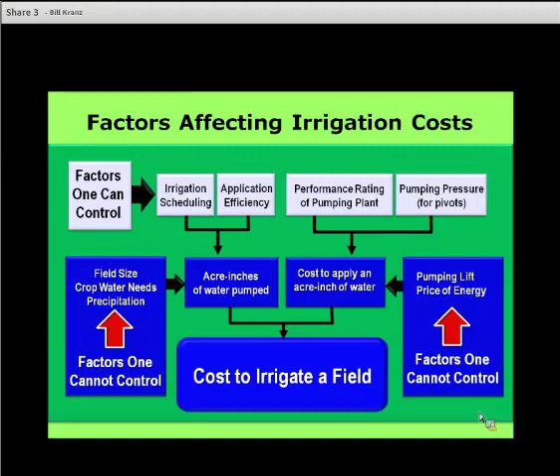and then water application efficiency is going to be just a small part of it. The idea is we're going to reduce the number of acre inches of water pumped by doing a better job of matching up with crop water needs and utilizing precipitation to the greatest extent possible. And again, we end up by summing those up to how much it costs to irrigate a field.

The management tools that we're going to talk about basically allow us to answer these four questions: when I should start irrigating, when I can stop, how much water does the crop require at different points of the growing season, or how much is it using out of the soil profile, and then have an idea of how much we're actually putting on.

One of the more traditional ways of looking at soil water monitoring and irrigation scheduling involves using the hand feel method, where basically we just take a hand coring device and collect a sample from different depths in the soil profile. This is the widest used method even in Nebraska today because that's what crop consultants typically will do. It's very practical. You don't need a lot of equipment.

The one thing about it is how accurate can you get, and you really need to be well trained and calibrated with your hand and have a lot of experience with different soil textures in order to do a reasonable job with this arrangement. But you have the answer right there on site. You don't need to necessarily consult a table of values for what the current soil water content is. You know it right when you're doing it.

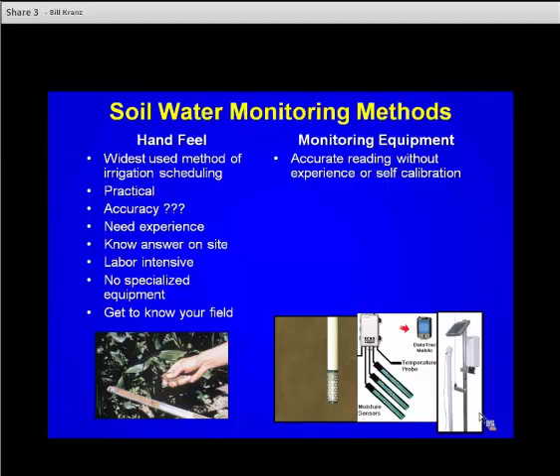But basically once we get into the monitoring equipment, and I'll talk a little bit more about these as time goes on this morning, we get an accurate reading from the soil that we're looking at, and we don't need to calibrate ourselves. We basically know the answer in the field, but we can then work on it in the office or make some calculations outside the field to do that.

We don't necessarily need to go out with a soil probe and probe there, and so the low labor requirement is there once the systems are installed. You get readings from the same portion of the field all season long, and these are the kinds of things where you look at trends and how the soil is responding, and then potentially make some adjustments in terms of whether the soil is getting wetter or drier with time.

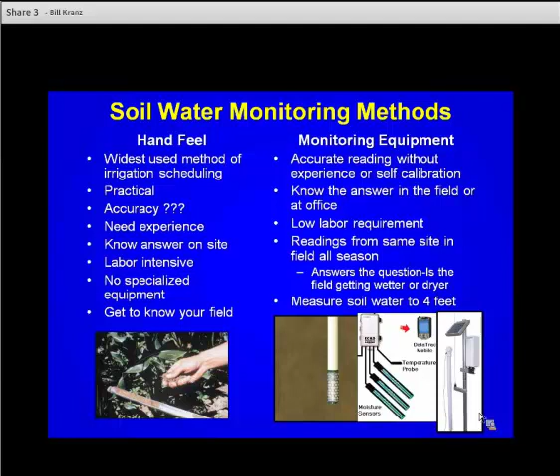And then typically you get down to 4 feet. There's not very many people in Nebraska, at least, that will use a soil probe down to 4 feet when they're doing this sort of thing. They generally stop less than that.

I have copies of this video available. We put together a video dealing with center pivot management a few years back, and it involves some interviews with some folks in Kansas. What you're seeing to start with here is a guy talking about his use of the KanSched program and how easy it is, and that his daughter is a sophomore in high school, and she basically does all the scheduling on the computer and feeds the information to her dad to go out and manage the system, based on what the KanSched system is saying.

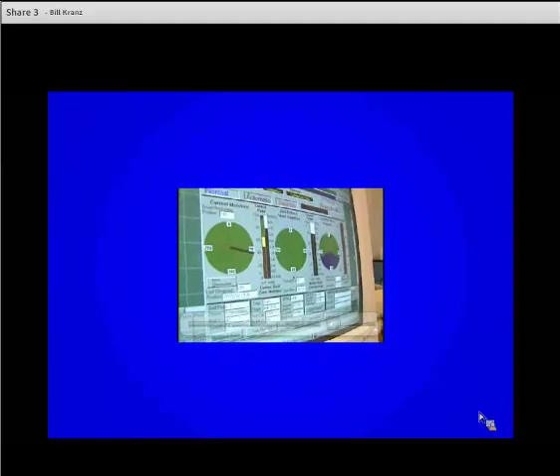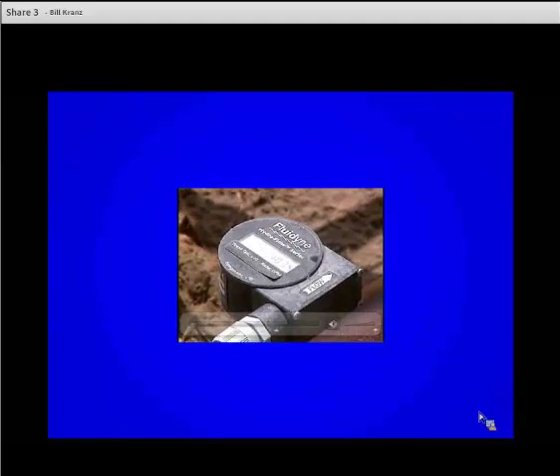Now, what's on the screen right now, and eventually you'll have the audio part of this too: this gentleman is a producer in south central Kansas, about 3,500 acres of irrigated cropland, and he's talking about the times when he feels he can shut his system off. He figures that on average about 5 days per year he can shut his system off using irrigation scheduling. He started off with a system developed by the ARS group at Fort Collins, Colorado, and Bushland, Texas, and a private entity has developed an application that utilizes information from the field and does the irrigation scheduling. He does that in his office.

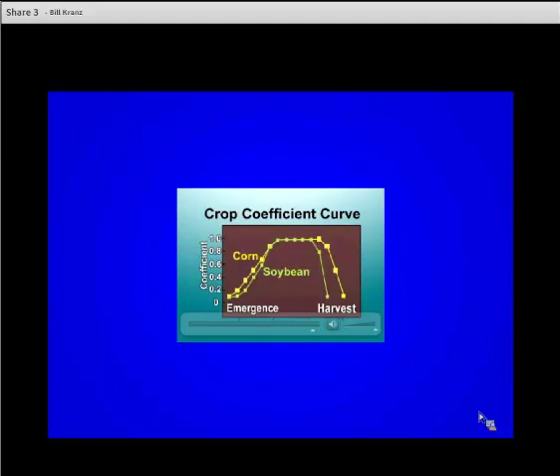And here's the 5 to 10 days of pumping per year that he's talking about. Early in the growing season, people tend to irrigate sooner than they need to, so he feels that scheduling allows him to wait until he really needs to start the system up. And if you have a rainfall event during the growing season, it will allow him to start up a little bit later by knowing the soil water content. The last part is at the tail end of the growing season, and he's referring to the crop coefficient curve on the screen. This is basically making sure that you utilize water out of the soil profile.

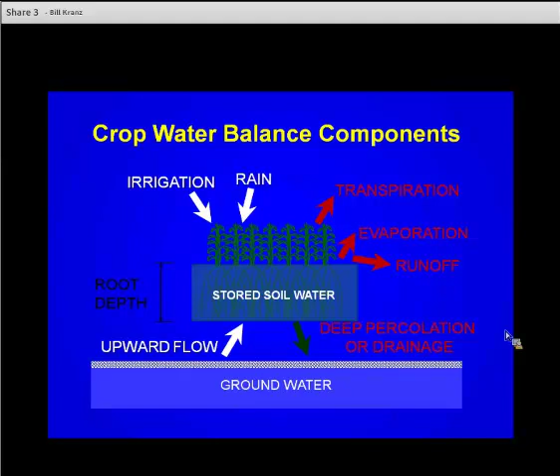Surface runoff then would be water leaving the field area, not necessarily the soil itself. Soil evaporation loss, there's a range in values; potentially up to 30% of the total crop water use is soil evaporation loss, particularly under irrigated conditions, and conditions where we don't have a lot of residue on the surface. And what we're really interested in is the last one here, and that's transpiration of the water that moves through the plant itself.

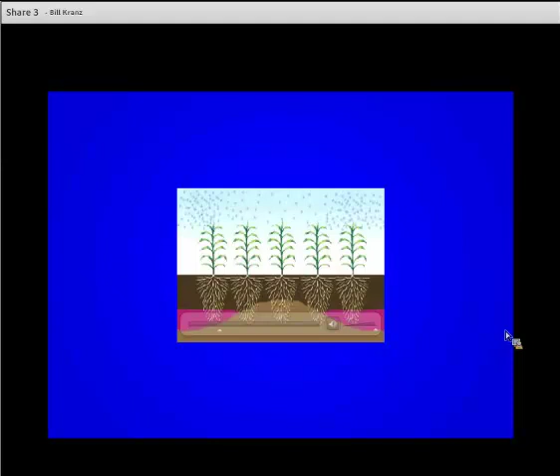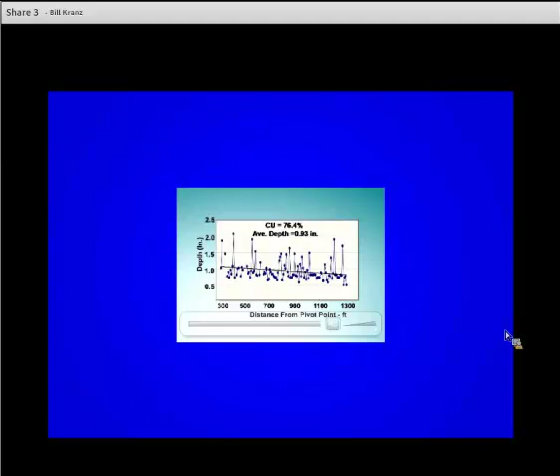And what happens then if you don't have uniform water application, typically, you'll see here in this image coming up, is that in areas that don't receive as much water as they should, if you take soil water readings in those areas, you're likely to compensate by irrigating again when you really shouldn't have to, just to get water into that portion of the profile. And so if you have non-uniform, in this case, a CU of 76%, you notice the downward trend. So basically, there's not enough pressure in this system to distribute the water at the far end of the system. And so these are the kinds of things that happen with wear and tear on the pump.

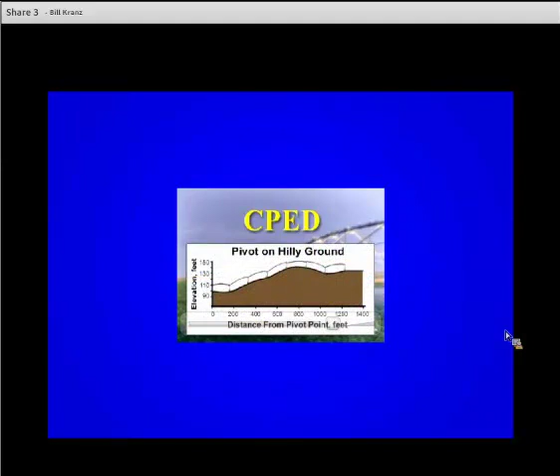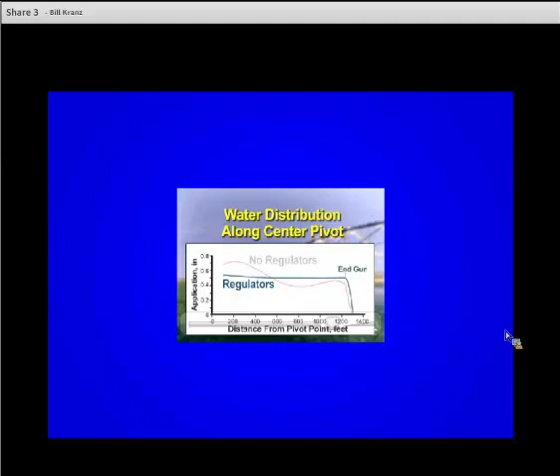The sprinkler packages certainly have a role to play in terms of the overall efficiency and uniformity of water application. And this CPED program was developed by Dale Heermann with the ARS group, and basically allows you to put in the profile of the soil that the pivot runs over, and then it'll give you a printout; you put in whether you have regulators or you don't have regulators on the system, and it'll show you the difference in overall water application trends with that kind of thing.

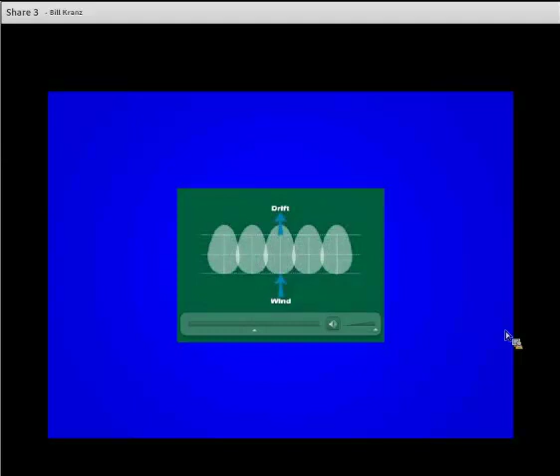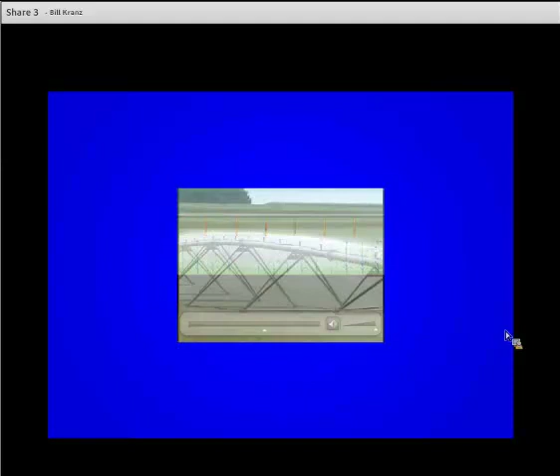So in here we're looking at the high pressure impact and the effect of spacing between the sprinklers, and we really need to try not to cut corners on this. We have wind out there, which blows on a daily basis. We're going to get some distortion of the water patterns here, and so the idea is that we put these sprinklers on the system close enough together so that the wind drift effect is not as significant, and that the overall infiltration of water into the profile is relatively uniform.

So we've got some spacing recommendations here in this particular portion, if we have them on top of the pipeline, and if you have them on drop tubes, or you're down in the crop canopy even closer to the ground than what I'm showing here in this particular image. And again, the idea is to make sure that we get uniform water distribution. And in some cases, we have maintenance issues and sprinkler package issues where the system is not put in right.

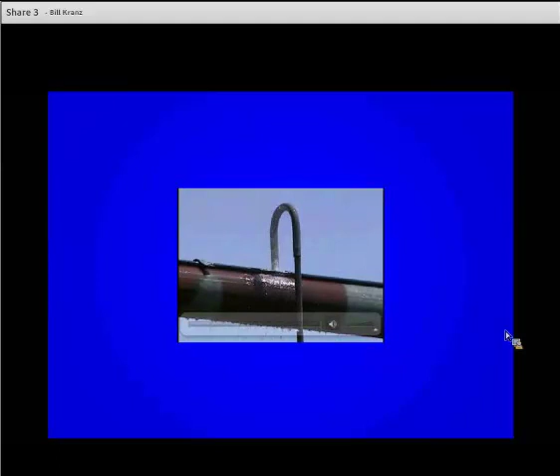Surprisingly enough, even with color-coding and numbers on the sprinklers, we still have some systems where the sprinklers are not put on in the appropriate manner. Again, this is some Kansas State data where the sprinklers in the last couple of spans were put on backwards. And maintenance here, we run into these all the time. I'm sure you've all seen them, geysers out there where the nozzle is actually blown out of the system. If you fly some of these systems where you don't get a whole lot of rainfall, you can see these issues quite easily.

And now we're seeing a producer actually go out and replace a sprinkler, basically with something that he just happens to have around, with the idea that he's going to go back and put the right one in there someday. That someday rarely comes. So it's better to have a supply of nozzles to put back there that are the right ones, and at least make sure that the overall distribution is as uniform as we can make it.

These are some images from North Central. We're from North Central Nebraska. So, any questions up to this point?

I see none. Okay. So let's talk about then getting into kind of the basis for irrigation scheduling. We start to use different terminology for some folks involved in this. One of them is a mass water content, or water content on a dry soil basis is another way to referring to it. Basically we're talking about the mass of water or the weight of water over the weight of dry soil, and it gives us an idea of how much water might be in that soil profile.

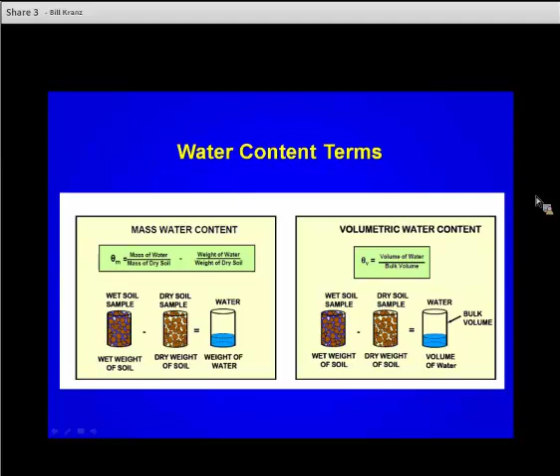And in this case, we're looking at coming up with a percentage normally of available water that allows us to do the calculations of how much water has actually been removed from the profile. So we look at a few more things here in terms of kind of a typical water release curve from a soil. And on the top, you start on the left-hand side, there's going to be some water above field capacity that might be in the soil for a period of a few days.

And traditionally, in irrigation scheduling, this water has not been accounted for very well. And we're trying to do a little bit better job in Nebraska now. This can take 2 to 3 days for this water to actually drain by gravity from the soil profile and out the bottom. And so it's freer water, easier accessible to the plant. And so we're now at least taking it into account that there may be some use of that water as time goes on during the growing season.

The middle part here is what we traditionally look at trying to manage. And the management there, if you look at the numbers that are associated here, field capacity would be, after all the gravitational water has moved out of the soil profile, 2 to 3 days after a big rainfall or an irrigation event. In this particular case, the silt loam soil, that number might be in the mid 30% range, or 0.34 here as a decimal.

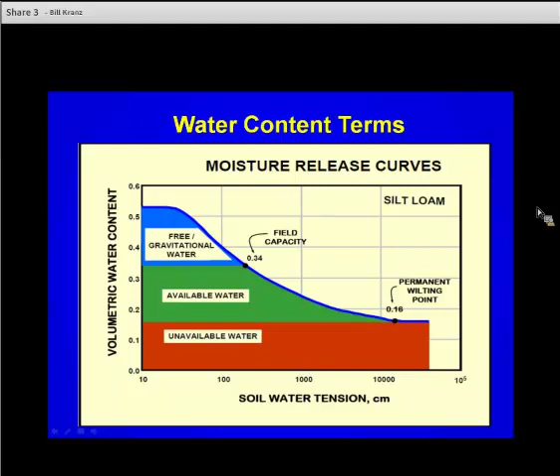Work done really early on in the irrigation stage found that you could deplete the soil water content to about 50% without impacting yield. And it really depends upon, I think, what the climatic conditions are in terms of whether 50% is a good number or you should be done watering a little bit sooner than that.

To do all of these things, we also need to know how much water is getting out there in the field. And we encourage folks, and I know that you do it in other states as well, to utilize a rain gauge. And it's not a bad idea to have these in a couple places.

I know in a field, in a quarter section, we certainly have really intense storms come through here, just like everywhere else, that tend to be isolated and could provide 2 inches of rain on one side of a quarter section, and less than an inch on the other.

So from the rainfall point of view, you really need to have a fairly decent rain gauge out there and use it. These are the ones that we use now in our Nebraska rain program, where producers record them and send the information on the internet so others can get an idea of what the rainfall distribution is.

On the right, the water meter. We're getting to the point now where water meters are being required by our natural resources districts because of the water supply issues. But regardless of that, you really don't know how much water you're putting on unless you have some way of measuring it. And a water meter that's functioning well and is well maintained is one way to get that number.

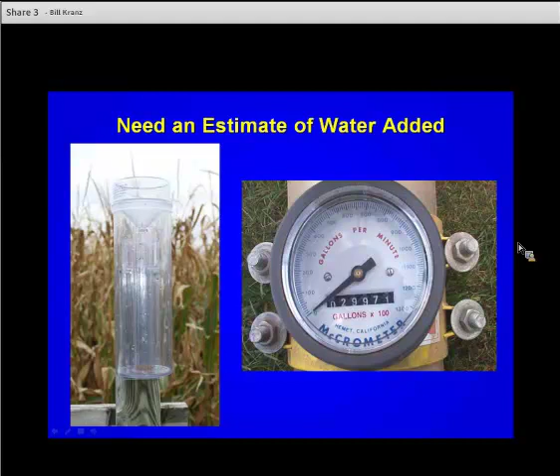Periodic numbers with the flow meter and the hours of operation can help get you there, but if you have water table fluctuations, you might find other things going on.

So as we look at trying to get into the season and manage these, the idea is that we start off with a yield versus ET line, and this really is more yield versus transpiration than ET, but it's a straight line. And if you start with irrigation and continue to add water, you're going to get an increase in yield that is fairly linear regardless of what crop you look at. And for some of you, quality is going to become an issue, so these sorts of things are also involved in that.

Now, when we get involved in the irrigation season, our irrigation systems are not 100% efficient. And so what we may actually have in terms of a yield versus irrigation line may look more like the curve that is now on the right. And the idea of water management is that we're going to get a yield here, but we're going to try to do a better job and improve our water application efficiency, or in essence, improve our water use efficiency by the crop, so that we don't apply any more water to the field than we need to get the crop out.

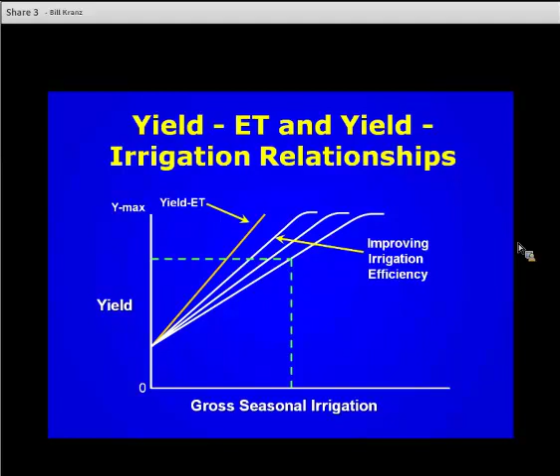Most states have some means of coming up with estimated crop water use from weather data that's recorded in various locations across the state. The regional climate centers are a clearinghouse for this information, and in Nebraska, this slide happens to be some work that my colleague Suat Irmak has been involved with over the last several years at Clay Center, utilizing the eddy covariance and Bowen ratio type of instrumentation to get a better handle on what the crop water use actually is out there in the field, both during the growing season, and he's also been doing work monitoring the water loss during the off season. But certainly, we need to have some means of coming up with crop water use estimates.

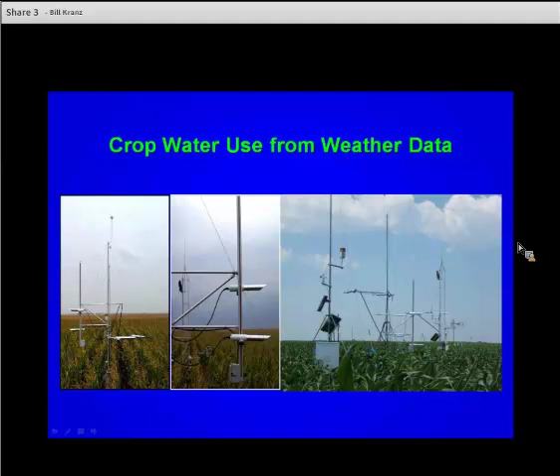As we look at the checkbook scheduling, we've got a large number of these available across the country, depending on what state you're in. And checkbook is just that: as I mentioned, the rainfall and irrigation is considered a deposit, and the crop water use, in most cases, is used as a removal of money from the checkbook. Fairly quick and dirty, and you don't necessarily need to be out in the field to utilize this approach.

And I just went through how we need to know how much water we're applying. In the case of rainfall, we need to be able to determine how effective that rainfall is. If we're on rolling terrain, we might have some surface runoff, and so if we're utilizing the checkbook approach, then we have to estimate how much of that water got into the soil, and that's where we can start to run into a bit of inaccuracy in this approach.

We also need to know how effective our irrigation was and how much water is getting into the soil when we apply water with the center pivot. And so you have water application efficiency involved in all kinds of irrigation systems that we need to estimate. And by and large, the crop water use is also an estimate. It comes from the weather data that we just talked about a few minutes ago.

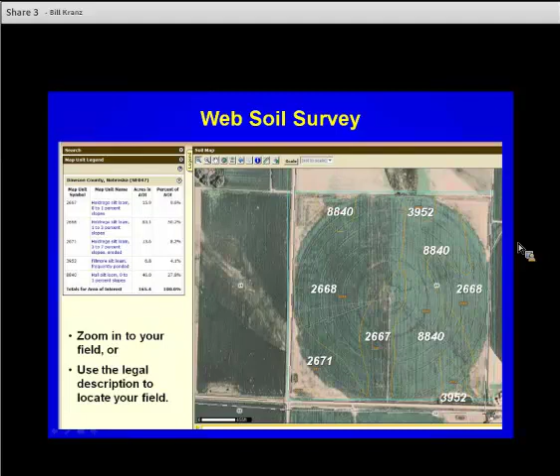Online, there's soil texture calculators where you have some idea of what the soil texture might be. You can get the percent sand, silt, and clay, and get the soil texture that you're involved with, and the dots with the silty clay loam or a silt loam over on the right-hand side here. Depending on how much clay you actually have in that particular soil, percent sand, silt, and clay is a good thing to have where we put soil water sensors out there, because in a minute we're going to talk about converting the soil water readings that we get from our soil water sensors to some depth of water that's been removed from the soil profile.

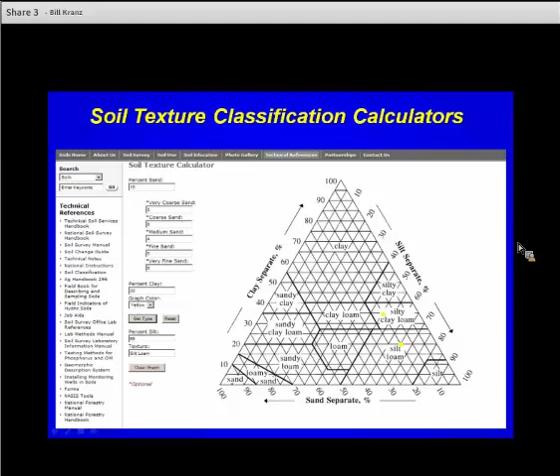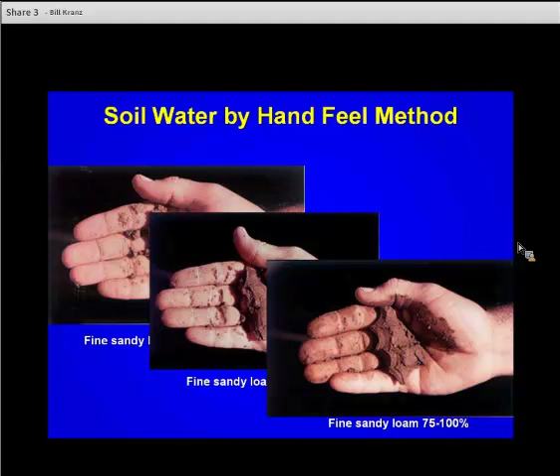Crop consultants are, in some cases, quite good at this, and in other cases, probably not. But they're probably going to try to be in this range on the far right one here, in the upper range of the soil water holding capacity most of the time, because their interest is to not cause a yield reduction due to not irrigating enough. And this is where soil water sensors, I think, are very helpful in terms of helping us feel more comfortable about going to soil water contents that might be a little lower than that.

In Nebraska, at least, we're going to talk primarily about a granular matrix block that was developed by some folks in California 20 years ago or so. And it's now marketed by the Irrometer company. The top part of this shows you if you order them from Irrometer, you're going to get the soil sensor with a wire attached and two tabs on the top.

These are now looking at somewhere close to $30 a piece, and they are durable enough because of the stainless steel and plastic construction that they can be used over multiple years. And so what we've done in Nebraska is add a piece of PVC pipe to the top. You can glue these on to the top. You see on the screen there the size of PVC that we're using, whether it be PVC or CPVC pipe. Either one will work just fine. You can glue it on, and so it starts to become something that you can install in the spring and pull out in the fall if you want to.

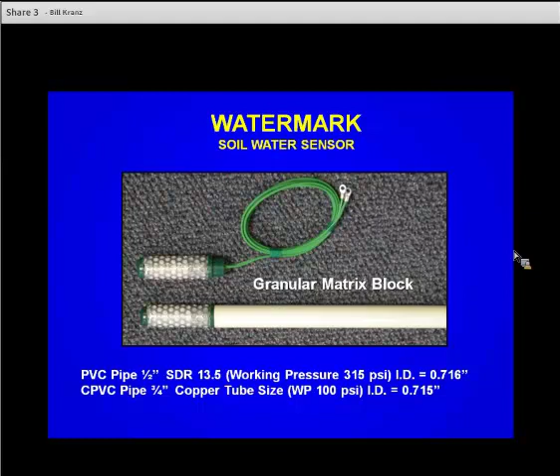Now, typically, we'd also drill a hole just directly above where the soil sensor is inside this tube, so that any water that might get into it will drain out, just a small little hole. And the reason is that on the top of these Watermark sensors, there actually is a little bit of a hole in the top that allows water to come out the top of the sensor. And if that's in the tube and gradually feeds down in, your soil water readings are going to be wet most of the year, when in fact the soil water content may be drying out.

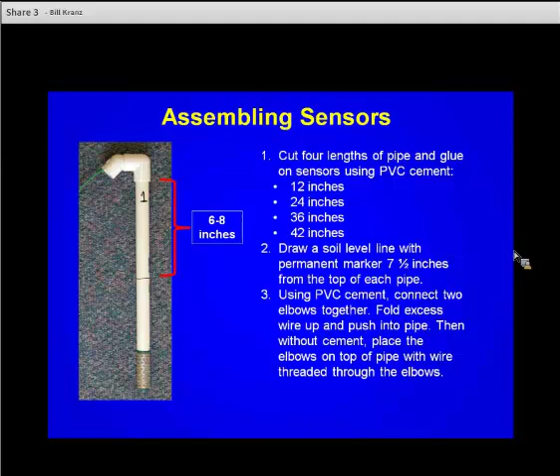So here's a look at maybe assembling these. We typically are going to want to have a portion of the tube stick out above the ground. In this case, I'm showing the 6 to 8 inches sticking out above the ground. And we want to make sure that no water gets into the top. So in our case, we're utilizing a couple of elbows that are put on the top of these and putting the wire out. And so you cut them to different lengths, and I'll show you the depth that we typically are going to put them into the soil profile, and we're going to glue these things together. And so then in the fall, we'll be able to come out and pull these out quite easily. Well, in some cases, quite easily.

Before we get started installing these in the field, we've got them constructed and are ready for that. The sensors need to be soaked in water and go through a couple of wet and dry cycles before you put them in the field. This is to kind of condition the sensor to read properly. If you're having them sitting in a bucket of water, they should read 0 if you're using a handheld meter. And if they're completely dry, they should read about 199. And we'll get back to that here in just a little bit.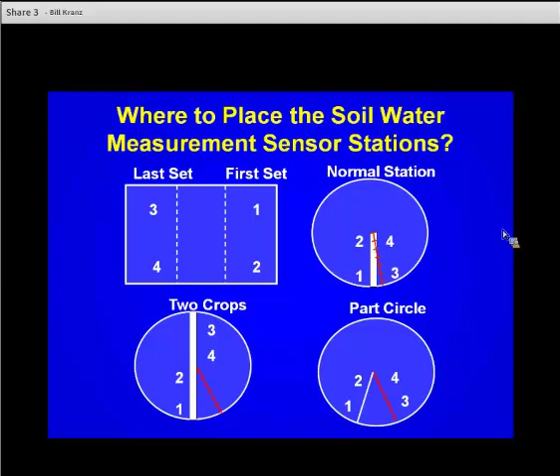And it does present some issues in terms of where we place them in the field, and makes that much more important. It basically then allows us to monitor one portion of the field and look at trends over time. So where we put them out in the field is, as I mentioned, more critical. We want to put them in a representative area of the field.

This happens to be a soil survey map, a copy from Pierce County, Nebraska. But in essence, each one of you will be working in areas that have soils that vary in a field site. If you deal with soil mapping units very much, you know that we've got some slope in this field. The E slope here is 11 to 17%, the CSE2 in the center bottom. We don't want it to be on top of that hill.

The CO here is essentially a 0 to 1% slope, and there's a waterway down through there. We don't want to put our sensors in that. We want to go for the main soil texture. In this case, we've got basically the Crofton soil, I think, that we have in the field.

And we certainly want them to be easily accessible if we're going to read them and use them for irrigation scheduling. So typically we'll put them on either side of our access road, or we'll use some sort of telemetry to get those readings out to an area where we can access them. Now, this can also be wires that are placed on top of the ground, and we'll see some of this here in just a little bit.

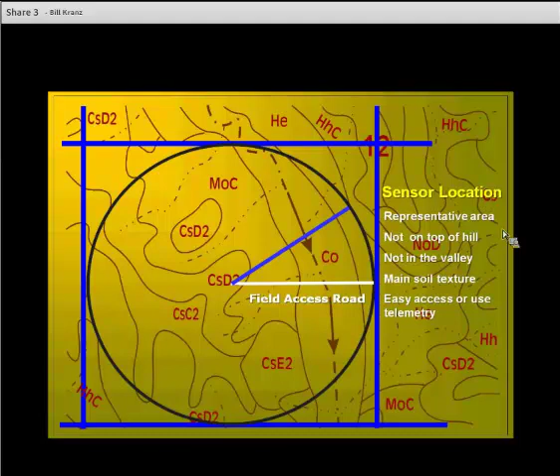Here's a look at a cross-section of a soil profile and the depths that we would normally place them. This happened to be a site where we've installed these sensors in a permanent installation so that the producer can till over the top of these if they're in the tillage mode. But typically we utilize the reading to represent the soil water content for a 1 foot depth of soil profile. And it doesn't necessarily matter all that much whether you place the top one at 6 inches or at 12. It's still going to be read and utilized as if it were in the middle of a 1 foot zone.

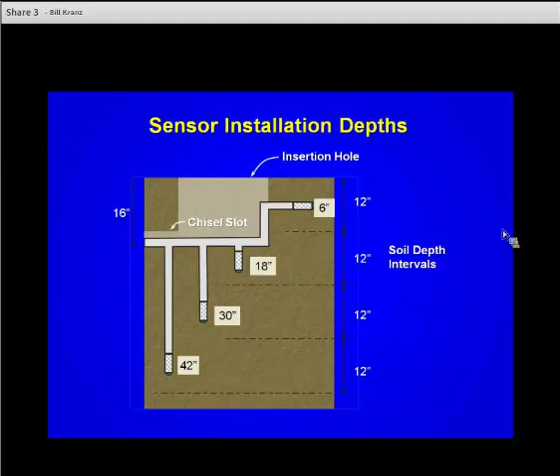And again, what you're seeing on the screen is what we typically have used when we do this. In this case, we're installing them a little different because it's a permanent installation. But the sensor depths are pretty standard, either at 6, 18, 30, and 42, or 12, 24, 36, and 48 inches below the soil surface.

Part of this has been tradition because of the potential for cultivating later on. And even today, going through with the sprayer can be a bit of an issue with Roundup Ready corn and all those kind of things. And so we install them early and in the corn row that you're seeing here.

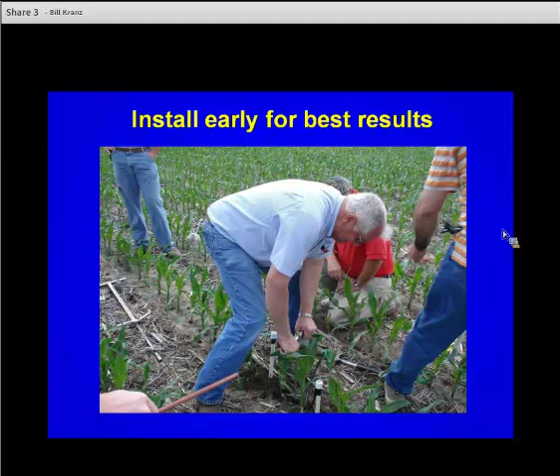In the south central part of the state of Nebraska, the Nebraska Ag Water Management Demonstration Network basically takes the producer to the field and has them be active in terms of installing these sensors out in the field. In some cases, they're going to determine where they're going to be installed. To a varying degree, we work hand in hand with them on a more or less day-to-day basis, answering questions and that sort of thing.

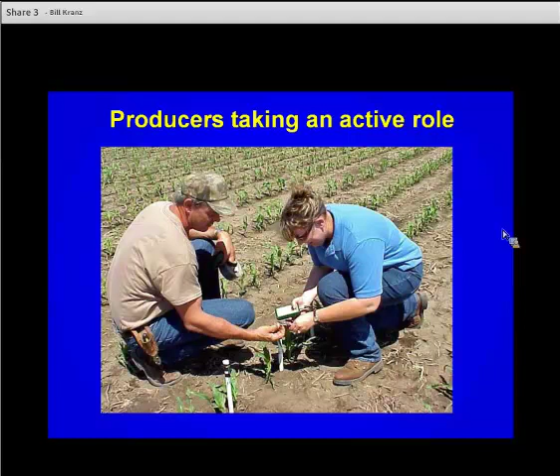And with the Watermark, if we want to get water moving in and out of that soil block, we need to have a good fit between the soil profile and the sensor itself. In this case, we want to use an Ag Consultant sampling tube, which is available from the company here. As far as I know, this is the only place that makes this particular diameter. The Oakfield probe is a larger diameter one.

So we typically will use this, and we want to specifically ask for the Ag Consultant sampling tube to put on there. I like to use an 18-inch long sampling tube because it allows me to get a little deeper depth of soil in the tube every time I push the probe into the ground.

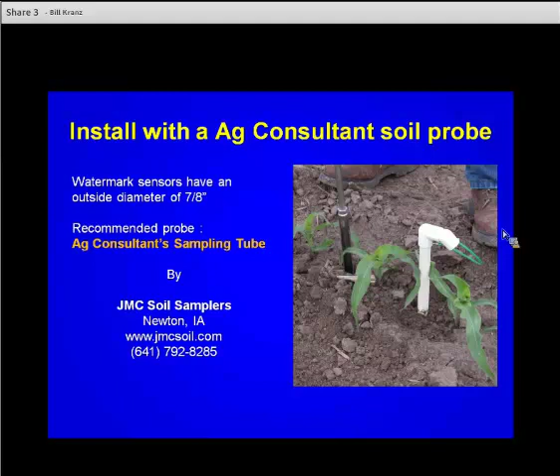It just works a little bit better to get the soil out. Labeling these out in the field is important. Eventually you get to the point where you forget whether you started on the right or started on the left, and so that approach is really not what we're looking for.

And so once they're installed in the field, you see here where the number 2 is circled. The idea is to label these. You don't necessarily have to label the 1-foot ones. I believe that this one is labeled, but it's on the other side that you can't see on the one on the right. 1, 2, and 3, and the 4-foot one would be off the screen here.

Once we have them installed in the field, we want to try to make sure that no water goes directly down the gap between the tube and the soil. And so we're going to try to tamp or pack some soil around the top of our tube here, and then follow up with a little bit of a mound to, if anything, cause water to drain away from these.

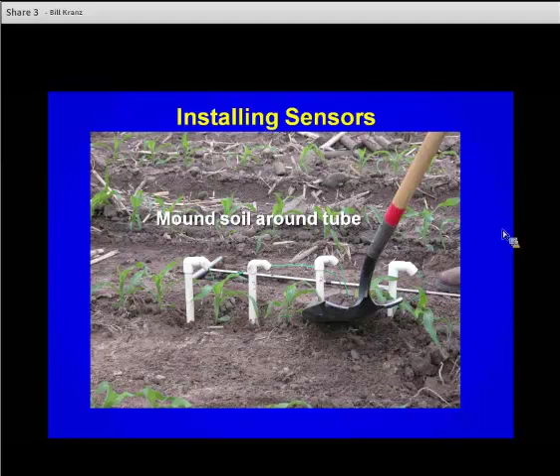Once the water gets into the soil profile down below, it's going to move laterally and equilibrate fairly well there in terms of the movement. And so trying to keep the water from going down the tube itself is pretty important.

Here's where we put it in a permanent installation, basically real quick like here, where it can be done to hook on the back of a subsoiling shank, basically pull a piece of PVC through the field and feed the wire through the PVC as you go. Typically, we can put these out in the field, at least the PVC part of it, for about $100, and get them out to some place where we can read them,

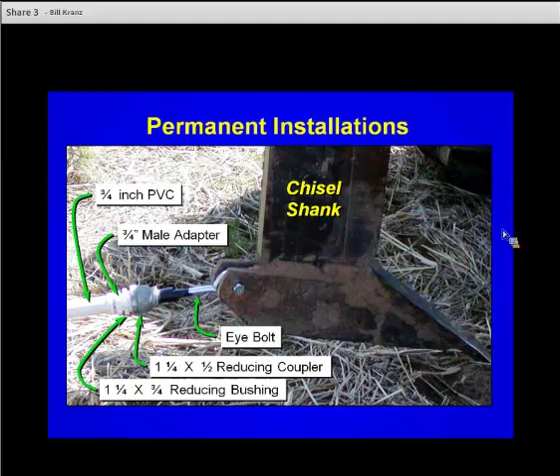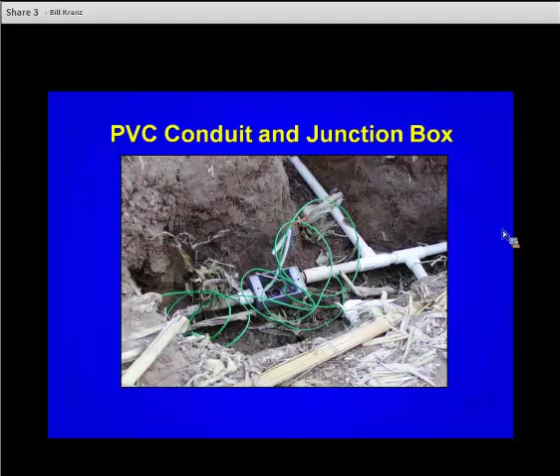then we'll have a connection, and I'll show it here, where we put the connections from the soil water sensors to the wire that goes to the data logging system, in this case inside of a watertight box, and bury these permanently. And you see the wires that are coming up inside this box to make the connection.

Any questions up to this point? No questions. Okay.

Most people now are going to be utilizing some sort of monitoring device or data logging system. This particular one is the one that comes from Irrometer, the company that sells the soil matric sensors. And you can hook 8 soil water sensors up to this, or you can hook 6 of these sensors and 2 soil temperature sensors up to one of these. And basically then you can program this data logging system to read as frequently as you want.

And when you come to the field and want to know what the reading is right then and there, you push the little green button in the center of the box here, and one by one it'll toggle through the sensors that you have installed that are attached to it. And in the fall, the producer then can download the soil water information utilizing the software that's provided by the company when you purchase the monitoring system.

Now, an arrangement like this will be somewhere in the $550 to $600 these days for an installation. Typically, this would allow us to monitor soil water content in 2 positions in the field. This works fairly well if the center pivot, in our case, most of the time is split half and half with beans and corn. You can monitor 2 different crops that way, or just 2 different positions fairly close by each other in one field.

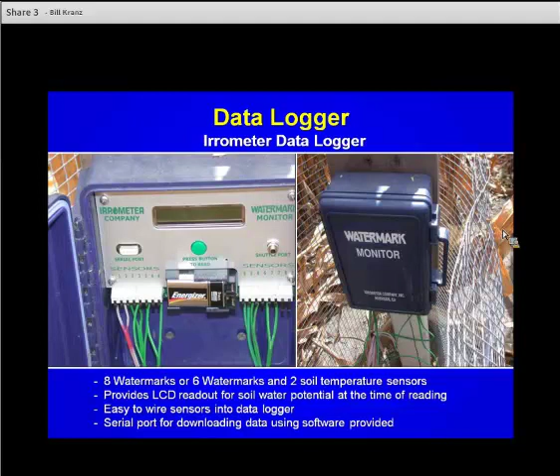The other data logging system that is out there for Watermarks was developed quite a few years previous to that by a guy who operates basically out of his garage even today in Oregon. The Hansen data logging system provides some rather unique features to it that the Irrometer does not.

On the image on the left, you see the LCD screen that is visible once you take the protective cover off. And again, there's a button in the middle that you push, and if you push that button, you're going to see the soil water content at that particular point in time, plus the last 35 days for that particular installation if it's been in there that long. And so it gives producers some idea of what the trends have been over time and how that particular sensor has responded to water applications during the growing season.

The image is actually, I think, in an alfalfa field, but it would work just as well for corn, soybeans, and other crops that you might have in the field. It's a little more difficult to wire these up because, you see on the one on the right, the wire comes in and you've got to take another cover off and feed the wires into a wiring harness thing at the bottom, and it's not as easy as it might look.

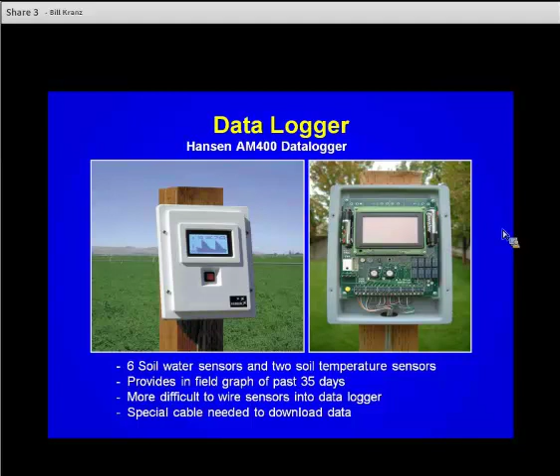And so they have a special cable for downloading it that you can buy as a feature, but basically you download the data utilizing a Microsoft kind of approach that is available in most computers. Here's a little closer up of the wiring of these, and also on the left-hand side you see a little silver port coming out the bottom, and that allows you to access the data and download the data without opening the box up later on, and it's pretty important to request that particular feature on the data logging system.

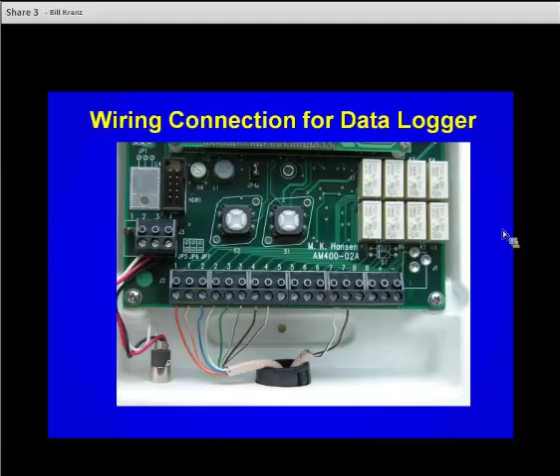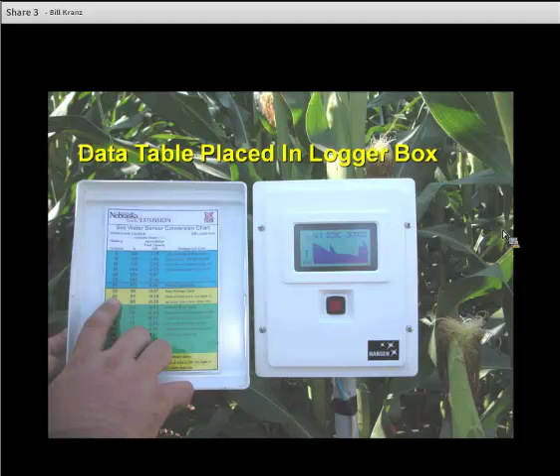Now, we've also utilized some work that was done by some folks with the ARS group in Washington, and it allows us to develop a chart that you see in this particular thing that we can put in the data logging box. And what it allows us to do then is take the reading that might be on the screen and go across in terms of how much water is in the soil profile, how much has been removed, and we have it color-coded so that we kind of get an idea where we'd like to be in terms of management with our irrigation system. This is quite helpful in terms of doing the mathematics later on.

This is a little bit more of a close-up. On the left, you see a chart here for the different soils, with the different colorations that you might see on the chart. A little bit of text in terms of where we'd like to be and where we'd like to stay away from if we're managing our irrigation system. On the right hand, you see that different soil textures have different amounts of water included in each one of these different depths or different components. And so it really does make a lot of difference whether you're in a sandy soil or a loam as to what some of these readings actually mean.

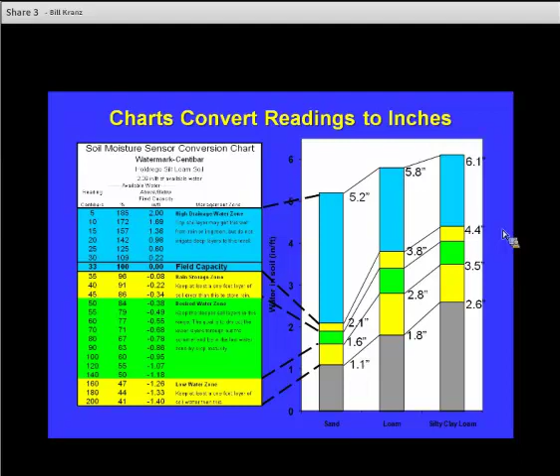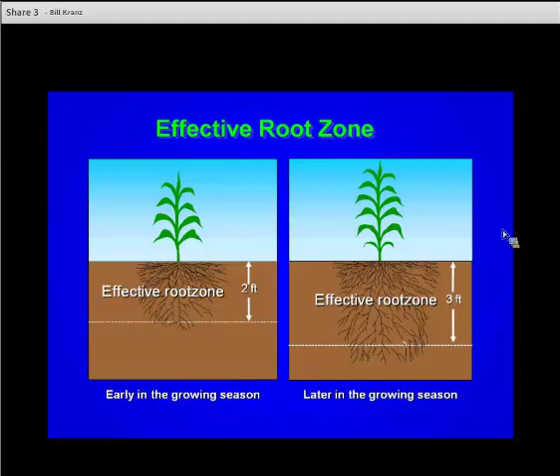When we get around to managing, obviously the effective root zone is a big issue. If you have the readings down to 4 feet, it doesn't make a whole lot of sense early in the growing season utilizing the 3rd and 4th foot because there's no root extraction from there. And so to take an average reading for all 4 feet might not be real effective. Later on in the growing season, as we get closer to tassel emergence, the root zone gets developed down to 3 and 4 feet in most of our soils, unless there's some sort of a penetration issue, and we're going to want to then take an average of the top 3 foot of the soil profile when we make those kinds of management decisions.

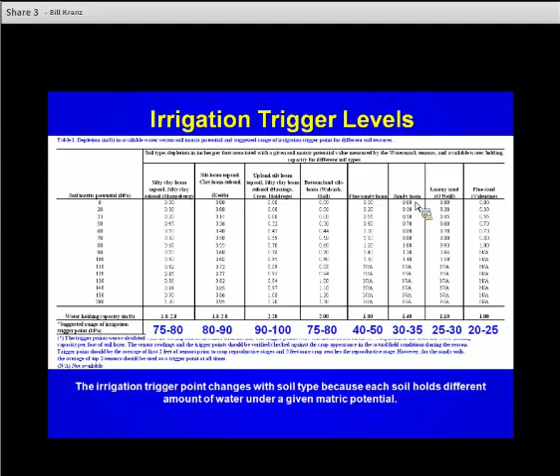And we have this in our publications, and these would be true of other publications from other states as well. But you know, this one was developed by Suat Irmak dealing with the watermark sensor. And across the bottom here, just to enlarge this a little bit, we have what we refer to as triggers for different soil textures. Basically here we're talking about when we'd like to start irrigating or be irrigating when we have different readings from the soil water sensors, because what we're getting over here on the far left is a soil matric potential, and we can convert to how much water has been removed from the soil profile in the table, but we want to utilize maybe a little different approach and use some trigger points as to when we want to make sure we're done irrigating out there in the field.

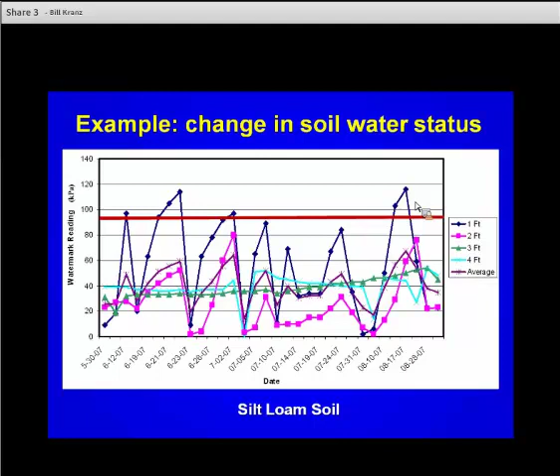And so we've got situations where we're above field capacity during the growing season due to rainfall or short-term irrigation that might refill that portion of the profile. There's all sorts of ways in which we can do some calculations based upon the readings in the field. And different states have different kinds of things that they're going to work with from that perspective. So I'd encourage you to look for those, and a lot of them are available online. They make converting the readings in the field to actual numbers you can use for management quite easy.

As we go along, there are telemetry things coming online that allow people to record soil water sensors out in the field and access them from some distance away. And it depends on the type of sensor you have as to how this might work. We do have a bit of an issue on center pivot irrigated fields in that we want the radio antenna and the transmitter to be above the crop canopy. These are primarily line of sight, and so crop leaves intercept those transmissions, and if we can't get the antenna above the crop canopy, then we have some telemetry issues.

And as you all know, the corn hybrids are now 12 to 13 feet tall in some cases, and you really can't put an antenna above the crop canopy and go over it with a center pivot, unless you have a means of causing the installation with the transmitter to kind of move as the pivot comes by.

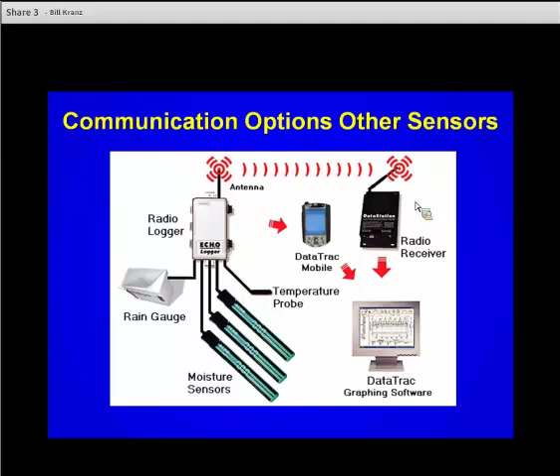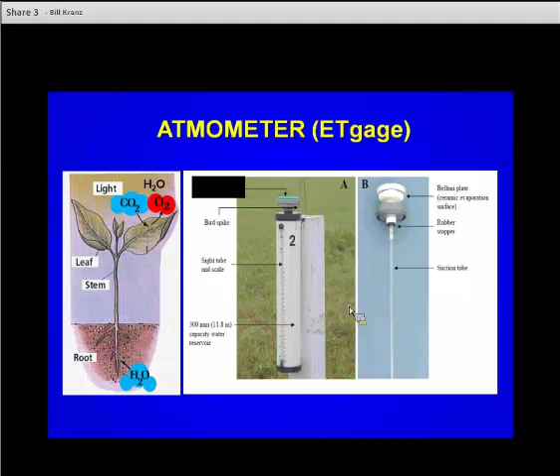And so, ordinarily speaking, we would not want to put these underneath the center pivot, because the water is going to accumulate on the top of that evaporative surface, and it's going to alter the evaporation that takes place from the ET gauge.

If you think about it from a rainfall perspective, typically rainfall events are going to be high humidity and come with cooler conditions that actually cause evaporation to decrease. If we're irrigating on a 90-degree day, we come across with a center pivot, and for half an hour we apply water on top of this atmometer, we're going to decrease the evaporation loss there, and the plants around it are not going to experience the same thing, at least not to the same degree. And so not underneath the irrigated areas unless it's a surface irrigated field.

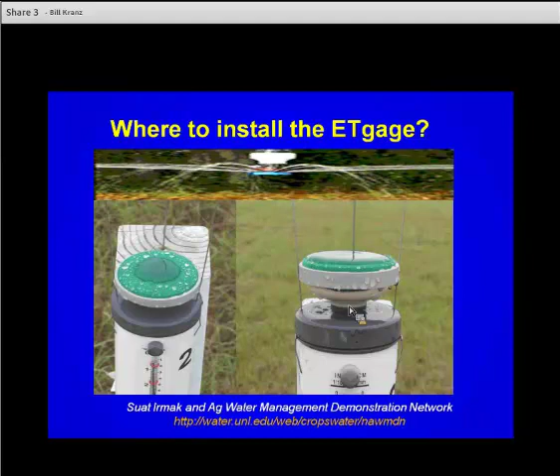The other thing, again getting back to getting material onto the evaporative surface: if we have dissolved salts in our irrigation water and we irrigate these, the salts are going to be left behind, and eventually the canvas material is going to be cluttered with them. So that's the other reason for not putting them underneath the pivot.

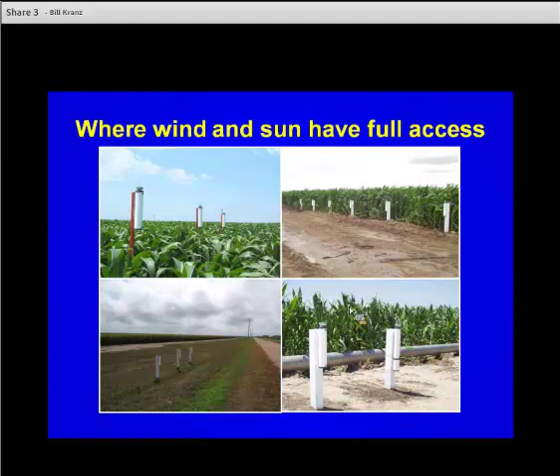You would have to keep moving this up as the season progressed and eventually have a fairly tall post. These can be in the corner and dryland corners of an irrigated field if that's a convenient place to get to them. We want to be able to get to them and read them in the same way every time we go into the field.

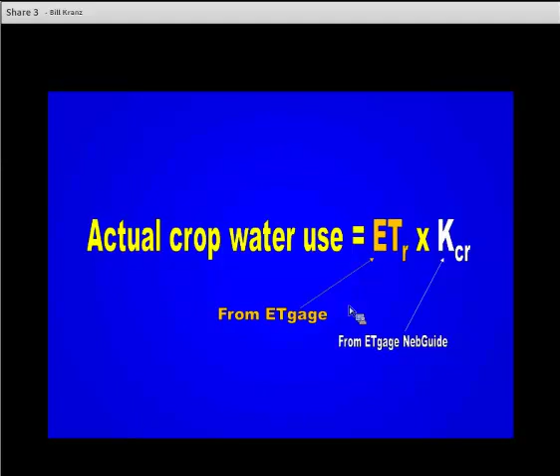And the way these work is that the ETgage is going to give us the reference ET just like the weather station data does. And so in order to get the crop water use, we have to multiply by a crop coefficient. And this information is all in that publication. And typically here in Nebraska, we use the same crop coefficients as they use for converting the actual weather data to crop water use for different crops.

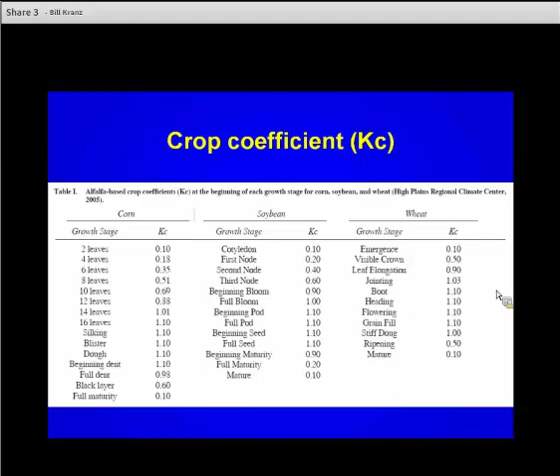So if we have just an example here, we have corn at 12 leaf stage with the canvas cover for alfalfa. The sight tube decreased 1.3 inches over a 7-day period. We want to determine the actual crop water use and get the net irrigation requirement and those kind of things. So the potential ET here is 1.3 inches. From the table, basically we're looking at 0.88. You do the math and it shows you that we really have utilized for that particular 7-day period 1.1 inches of water.

And depending upon whether we got rainfall during that period of time or not, we make an adjustment for rainfall. So our gross irrigation now is going to be the water use for the week divided by our application efficiency that gives us 1.3 inches of water applied. So very simple math to get at our need for what the irrigation amount is going to be.

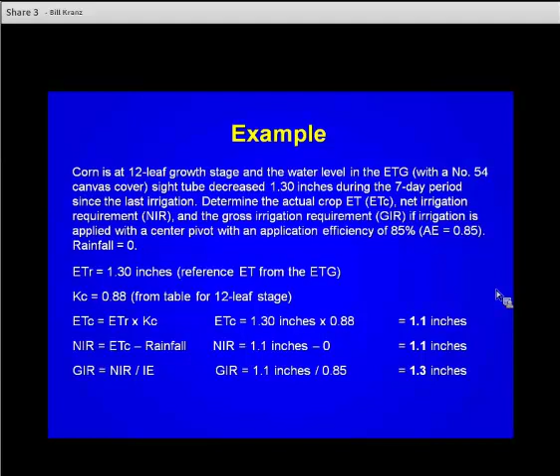Now, utilizing the irrigation scheduling from the Nebraska Ag Water Management Demonstration Network, they surveyed the people that have been involved over time, and their surveys would suggest that we're getting about 2 inches of water savings per year because most of these people have some fields that they schedule and some fields that they don't. And they started off with 1,500 acres in 2006, and we're over 500,000 acres last summer involved in that network, and it's a sharing kind of network. But 2 inches of water, kind of overall average, is what you might expect.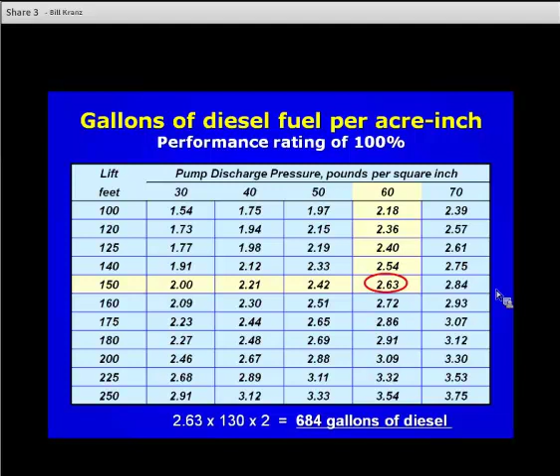And in most cases, not all cases, these kinds of things can be done without impacting yield at all. It's getting back to what the gentleman from Kansas would say, and that is that there are opportunities to not irrigate during most growing seasons that allow you to save some water if you do a good job of scheduling.

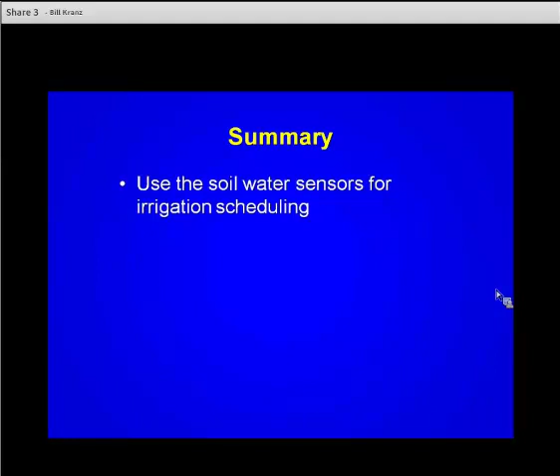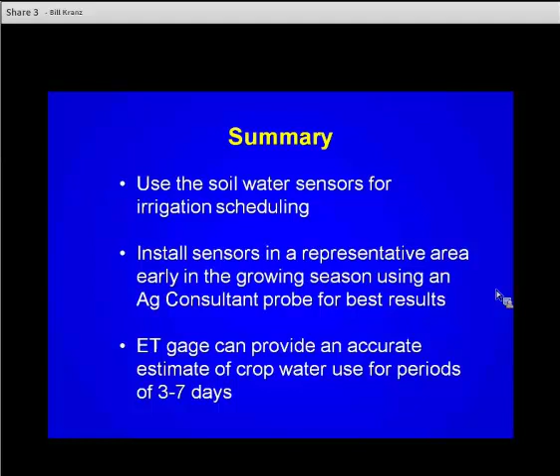So, kind of in summary, then here this morning, we've always recommended people use soil water sensors for irrigation scheduling purposes, and we're getting more so all the time. We want to be able to do this in a representative area of the field and watch the progression over time. If we can also then get at how much water the crop is using with an ET gauge, that's typically good for periods of 3 to 7 days. I wouldn't want to do it on a daily basis just because there's some differential in reading from day to day. And so 3 to 7 days typically is what we would recommend.